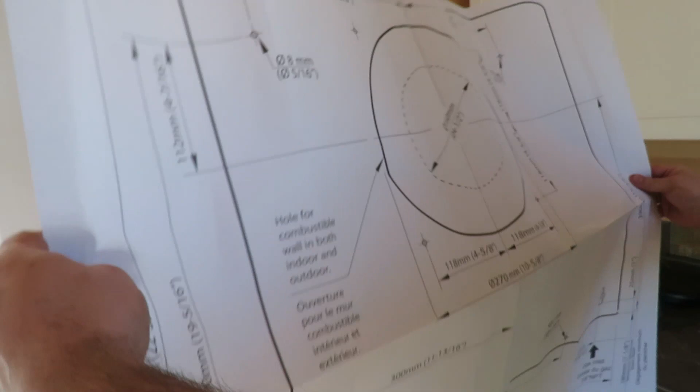We're thinking of putting it in this corner, and as you saw, it came with this really nice guide that you can stick up on a wall. It sticks up there, and then you just saw through the hole. Just make sure of your placement of the unit before you make any big holes in your cabin.

So we're just measuring from the window. Requirements are about 6 inches from the window, but our gas installation technician says that 12 inches is best so you don't get fog up on your window.

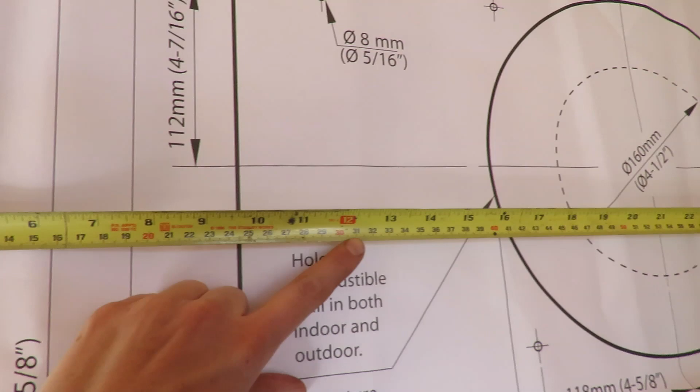There's the 12-inch mark, and then we want to add a little bit more here. So have it out this way. I can actually move it over—it has to be 3 feet from the edge of the cabin, so we can slide this over a little bit more.

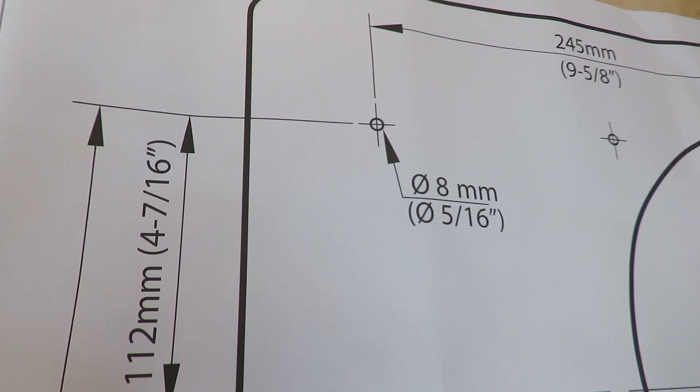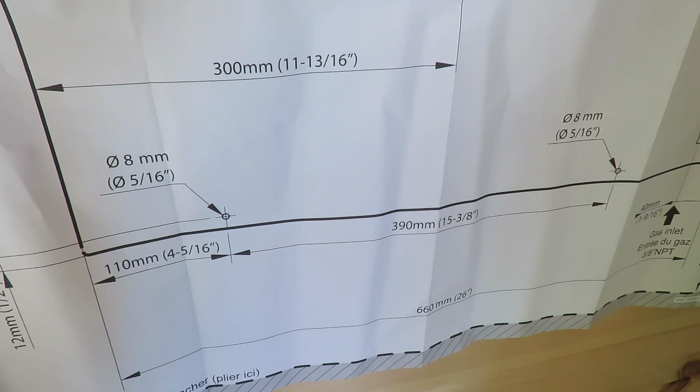What we want to do is make sure we can get these onto studs. The extra trick is to try to get these mounting holes into studs. Unfortunately, that might be difficult, because these holes on either side are a little over 19 inches apart, while the holes down here are 15 3/8 inches apart. So you're just going to get one in the stud and maybe just graze the other. That's kind of unfortunate, but we'll make do.

Looks like we've got it a nice distance away from the window, from the direct vent hole there, and it needs to be about 3 feet from the edge of the cabin. So now we have to use a level to help make sure this is nice and straight on the wall.

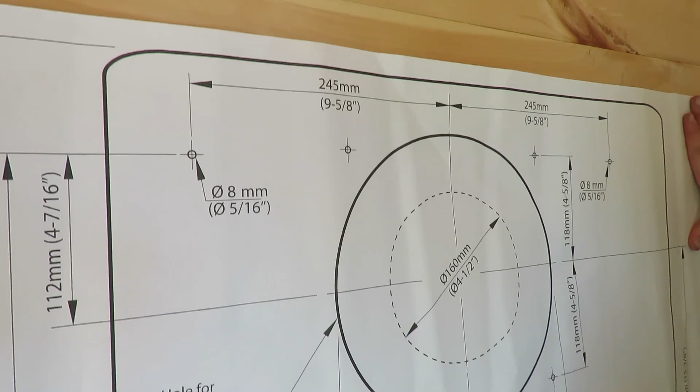Alright, so I just made sure it's level here, and it looks nice and level. I've taped it onto the wall, so that's what it's going to look like. I guess we'll get cutting.

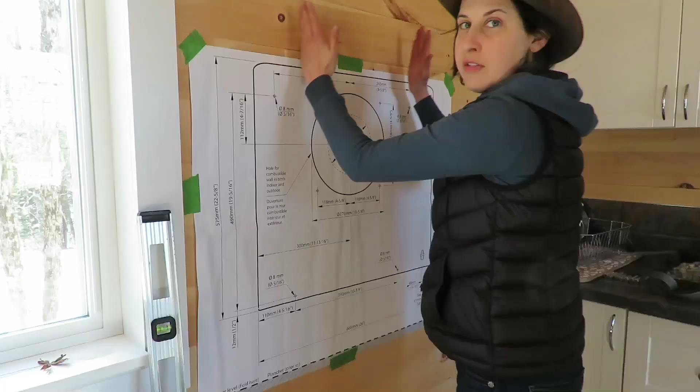Now here's the stressful part. It's on the wall, we're marking off the holes, and now we're going to cut a hole in the wall that's pretty big. Hope this works out. Here you can see the location of the 2 studs, so we're going to be going right in the center. There's no wires or anything in this wall, so we should be good to go.

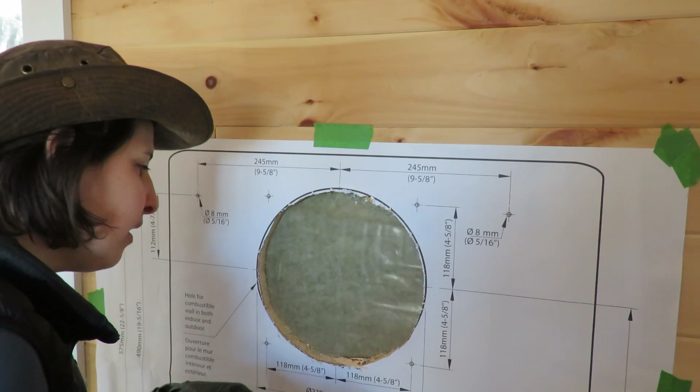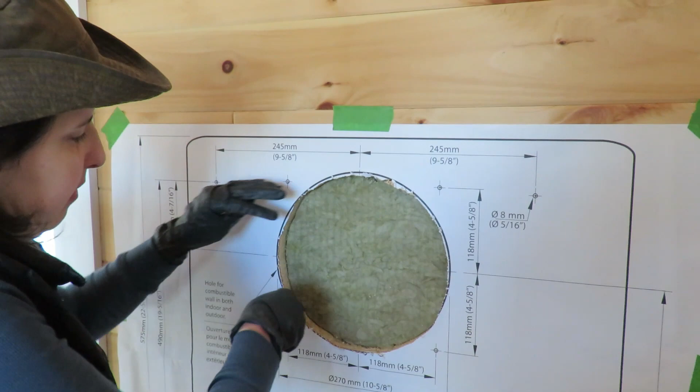And we're through. There we go. I've got my knife—I'm just going to kind of go in a little bit more. Cutting, a piece of cake. And just going to take this back out. It's going to make a bit of a mess, but I've got my gloves on.

There's the outside wall of the cabin. There's the stud—I can see the stud right in here. And I got the other stud. So we're right dead center.

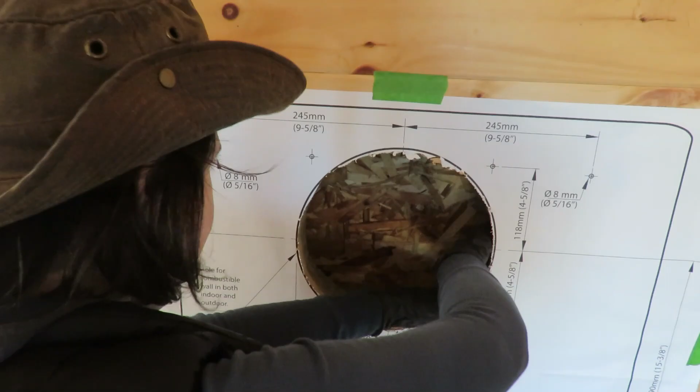This is awesome. Now we just have to transfer the markings to the outside wall of the cabin there and punch it through to see some daylight.

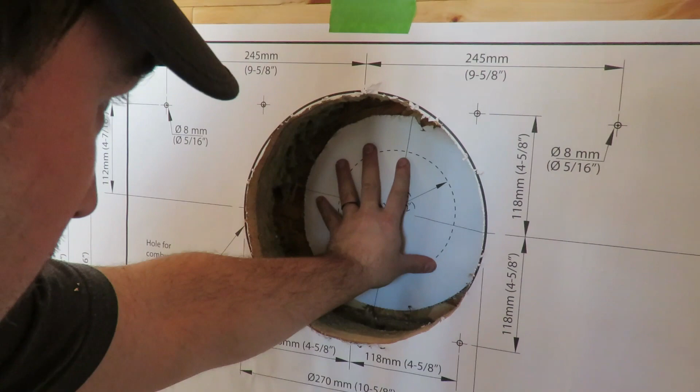We're just marking off now so that we can make the hole matching on the outside. Since we're going to be cutting from the outside, we're going to put some drill holes here, and then we'll use that to measure the circle on the outside of the cabin.

And there's the hole. So it's right centrally between these 2 pieces of siding. That's perfect—it's going to look something like that. We'll just trace that on and we'll cut.

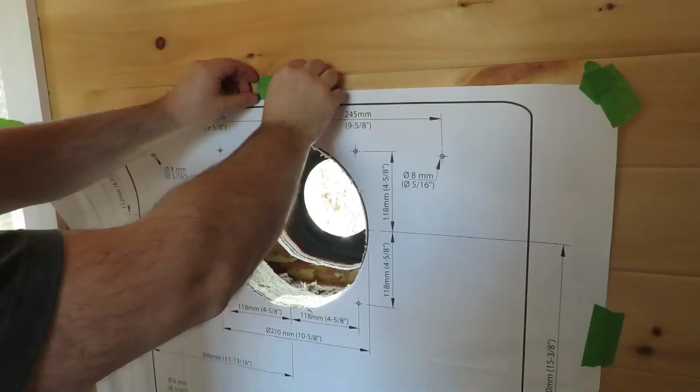Alright, so we finished off marking what we need to mark, so this is going to come off the wall for now.

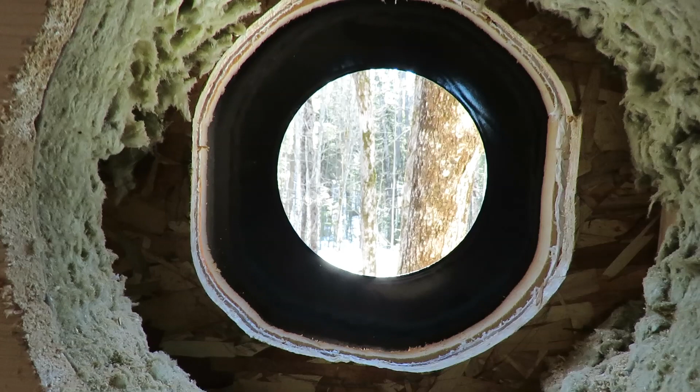You see I put the black plate on outside. We didn't secure it yet, it's just to see what it's going to look like. So this shields the opening you've made from all other layers of the wall. We just have to mark it and get it put in there. So this is the thimble that lines the inside of the hole.

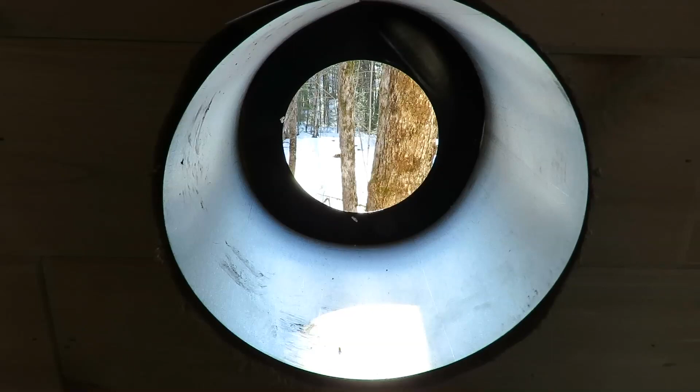So what we're going to do now is we've measured out the thickness of the wall and we're going to cut it with the saw. All right, it's cut to shape, cut to length. So here you can see that the thimble is now cut to shape and sort of seals off the hole that you've made. And that's, again, the outside panel.

It doesn't really say in the guide how to fix the thimble in place, but we're probably going to just use a few little screws to tack it in there.

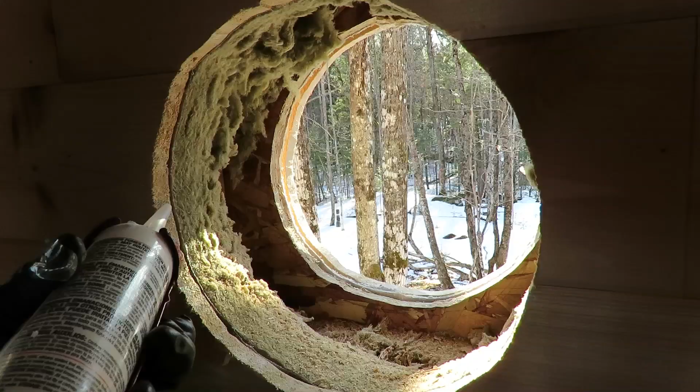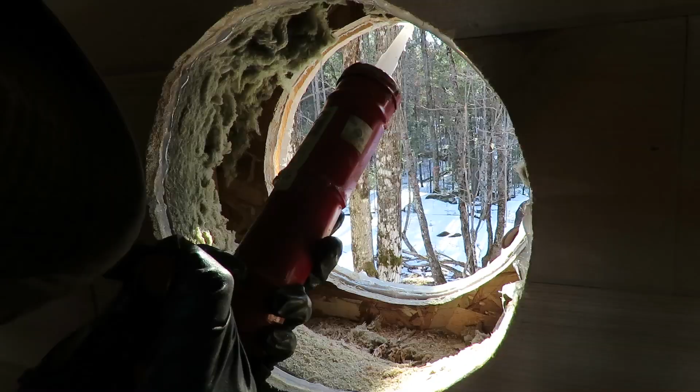Now I'm just going to caulk the edges of this to help seal it down a little bit. High temperature silicone. Just let it start expanding. Oops, I just got silicone all over me.

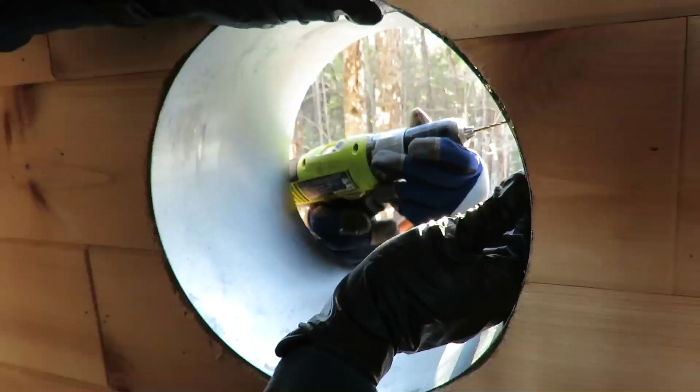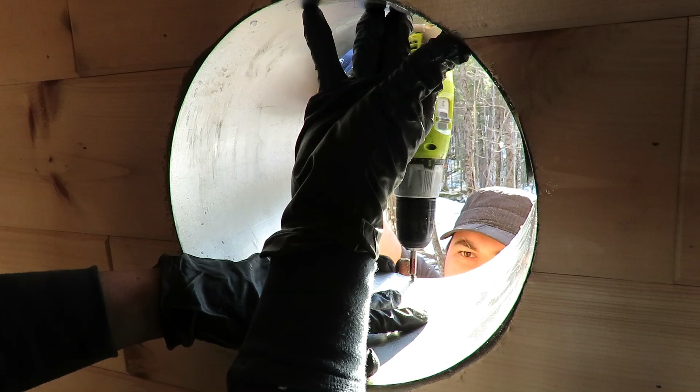Don't really have a screw small enough, but this will do. So you can see we've just put a couple of screws in here and one at the front there. Just have to trim this a bit.

Next, we've got to install the outdoor plate and then the indoor plate as well. And we're going to have to install the tubing that vents out, takes in the cool air and lets out the hot air. It's going to have to be at a 2-degree angle so that rain doesn't come in the cap from the outside.

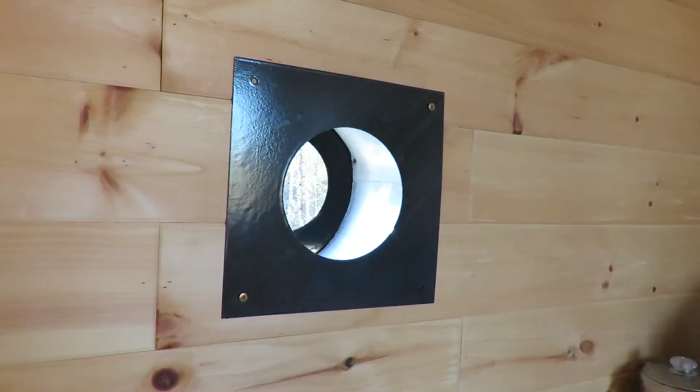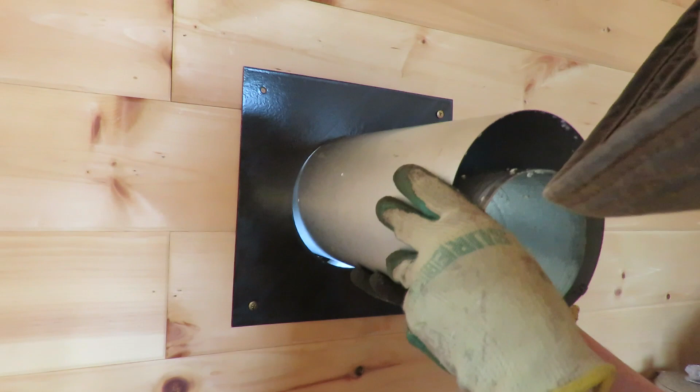All right, so what I've done is I've done the inside plate. And now I'm going to insert this tube here, the vents. So that's about the depth it's supposed to come through to.

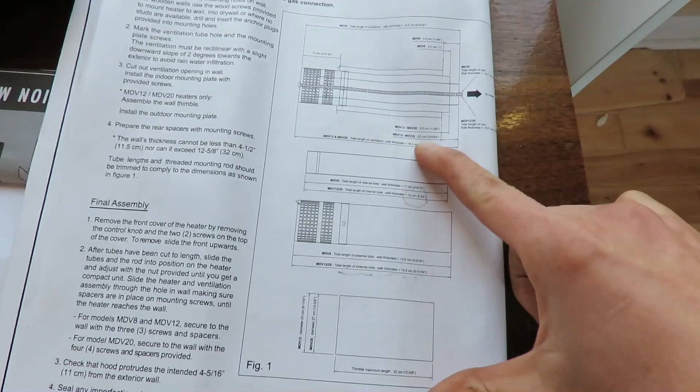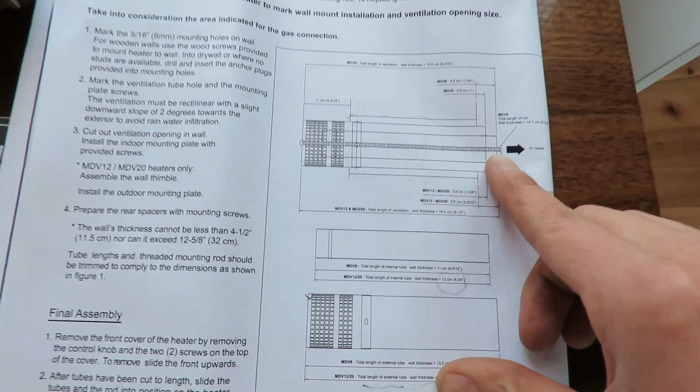So what we're doing now is we're measuring the direct vent insert here. We're measuring the internal tube, the external tube, and cutting it to length for our measurements, as well as the little rod here. We've measured our wall thickness, and here it tells you how much you need to add to it in addition to the wall thickness for it to match up with the unit. So let's get out there and do that.

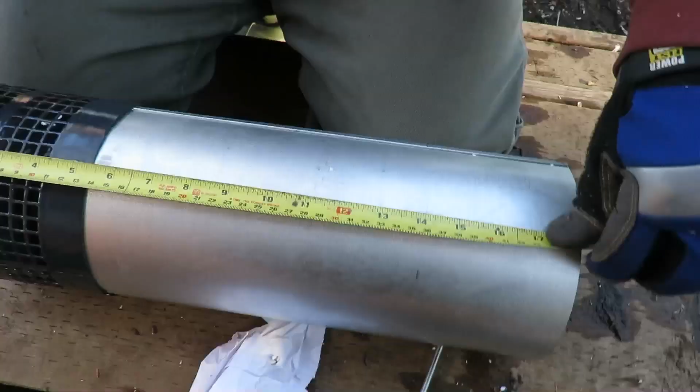So we've got the external tube here, and we're measuring 14 1/8 for its length, and it goes right from end to end.

So we have our tubes all cut to length and the threaded rod cut to length. Next, we're going to remove the front of the unit and make this one compact unit with the direct vent tubing and the unit itself.

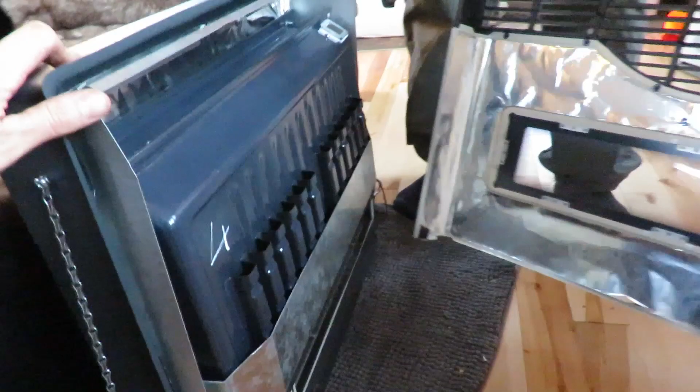Okay, so this front comes off. Let's watch the glass. And that's what the unit looks like inside. Here's the inner sleeve, and then we're just going to put the outer sleeve on. So as you can see, it is now one compact unit.

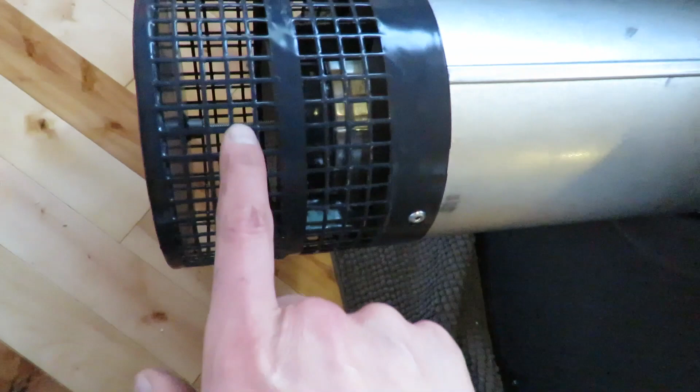This was really challenging actually to get these tubes on here, especially when you're trying to thread in this little screw, this really long screw all the way down here. Make sure you put that in first and then thread the tubes over it, or it's going to be a nightmare trying to find where it attaches to the unit.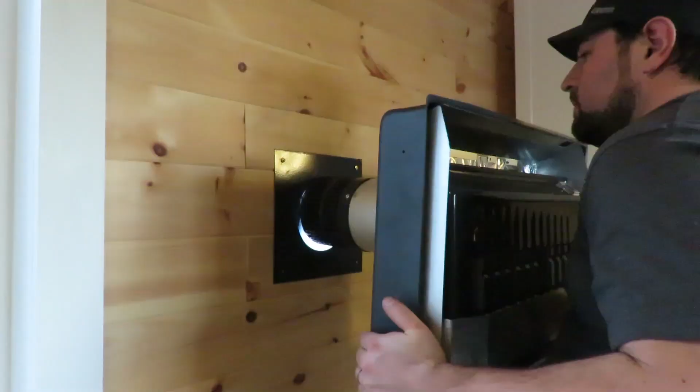So now we're going to put the unit in the wall and double check our measurements. And now you reinstall the front.

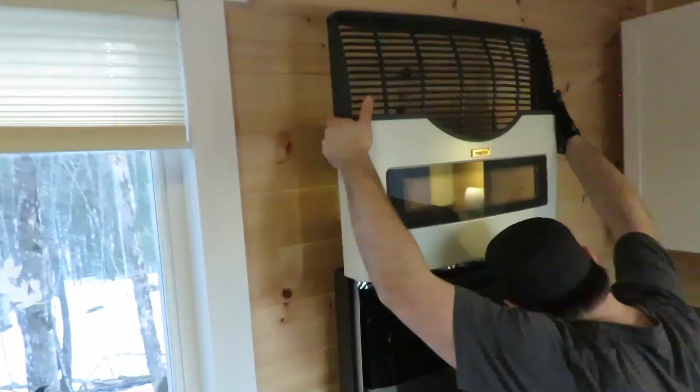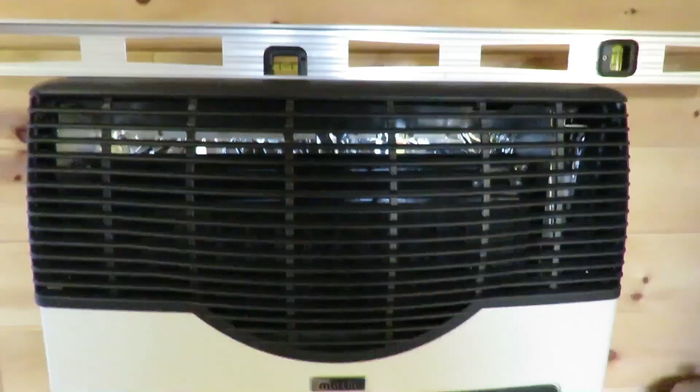Okay, so the unit is now in. We've got the cover on and we've confirmed it is level, thank God. We've got the screws back in there on the top and the knob is installed.

Here we are, it's the next morning. I lost my light last night, so I don't think the video was that great.

So here it is, the final install, and you can see how nicely it fits in the wall there. It's perfect between the cupboards. The doors open wide without any issue. There, that opens up nicely at the bottom here. We will put a stopper so you don't smash into the wall. And this kitchen cupboard right here opens up nicely and doesn't hit the unit. So perfect.

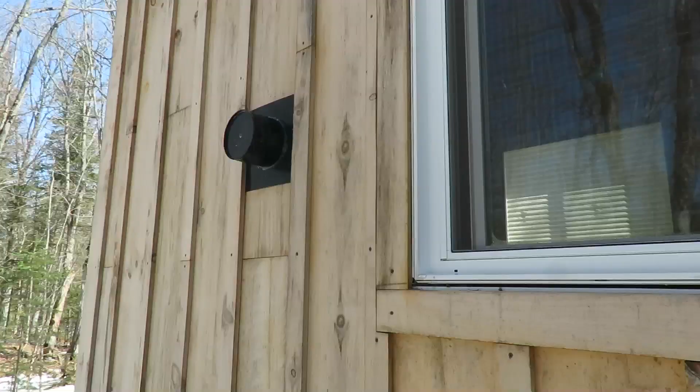Let's go outside and see what it looks like outside. And here's what the final install looks like on the outside. So we've got the plate, the vent cap there, and we've got it sealed with some high temperature silicone.